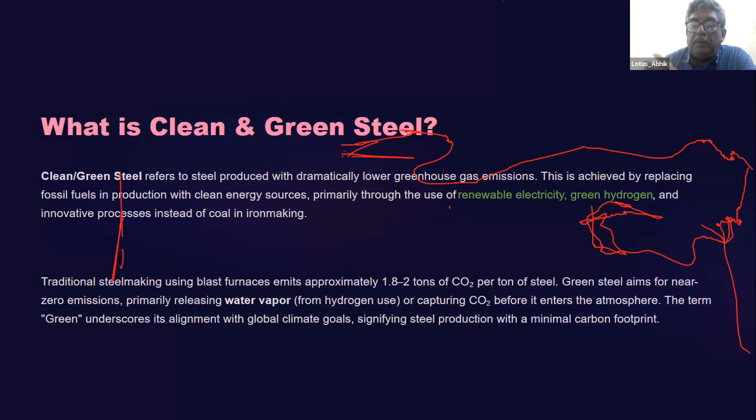The iron and steel sector accounts for 7 to 8% of global carbon emissions, more than any other heavy industry, primarily due to its dependence on coal in blast furnaces.

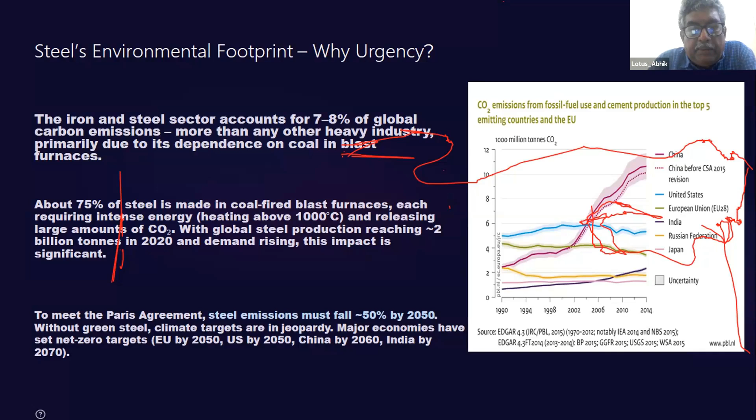Now let's come to the next slide, which is again a little bit of repetition. Global carbon dioxide emission, according to the World Steel Association: 1.88 billion tons of steel were produced globally in 2020, resulting in 22 billion tons of carbon dioxide. That is the figure.

And where is this carbon dioxide coming from? It is coming from the blast furnace and basic oxygen furnace route - 73%. Then the electric arc furnace route - 26%, and the remaining 0.5% from other sources. This share means that amount of carbon dioxide is being emitted in steel plants. Most of the emissions are coming from the blast furnace BOF route.

And about 75% of steel plants use this blast furnace BF route. Then comes the electric arc furnace, another route of steelmaking, which covers 25-26% of steel plants and also emits carbon dioxide. But as you can see, the blast furnace BF route is the main culprit.

Now coming to the blast furnace BF route: this BF-BOF technology uses coke to produce heat and, as a reducing agent, turns iron ore into metallic iron. So BF-BOF demands 8% of global energy and emits 7 to 9% of global CO2 emissions - I'm repeating, almost 10% of global CO2 emissions. The BF-BOF route requires 800 kg of coke to produce 1 ton of steel, and it emits almost 2 tons of CO2 per ton of steel.

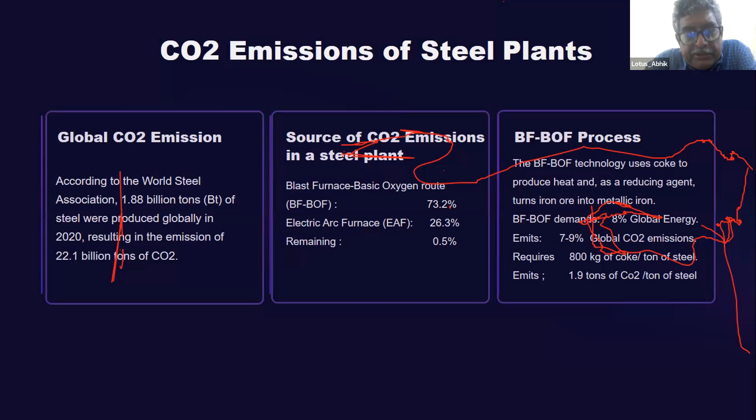Okay, now if we want to move forward and see how this can be reduced, we must know what BF is. Any questions so far? What is the BOF route? What is EAF? Then we'll go forward to see how this coke and coal can be replaced by hydrogen.

This is the blast furnace. On the left-hand side, you can see the blast furnace and the stoves - hot air stoves. In the stoves, air is heated up and pushed into the blast furnace. What is happening in the blast furnace? It basically operates on the principle of chemical reduction, whereby carbon monoxide converts iron oxide into elemental iron.

It converts iron ore into molten pig iron by charging iron ore, coke fuel, and limestone into the top of the tall vertical furnace. Hot air is then blasted into the furnace, causing the coke to burn and create carbon monoxide, which ascends as a gas to reduce the iron oxides descending from the top into molten iron. Limestone reacts with the impurities to form a liquid slag, which floats on the molten metal. The molten iron and slag are tapped from the bottom with the hot gas exiting the top.

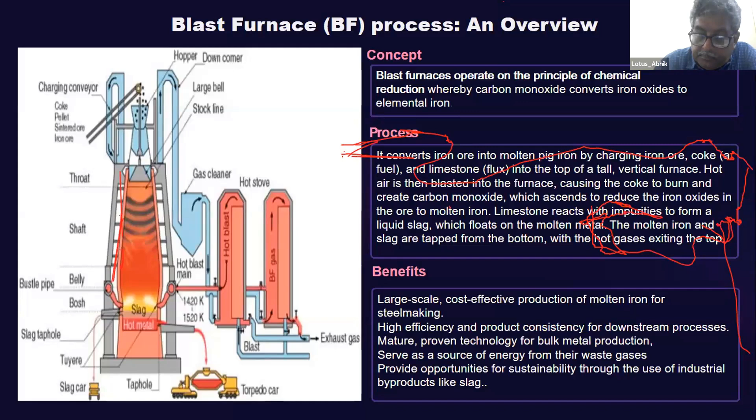Coming to the next slide, these are just the reduction equations. If we see the reduction equations, on the right hand side it is generating CO2, and that is the reason I put these reduction equations here. Fe2O3 is hematite, an iron ore. Fe3O4 is magnetite, an iron ore. FeO is wustite, an iron ore. These iron ores are reduced by carbon monoxide, and carbon dioxide is produced, which is a waste gas - which is our topic today, and which is polluting, which is not green, not clean.

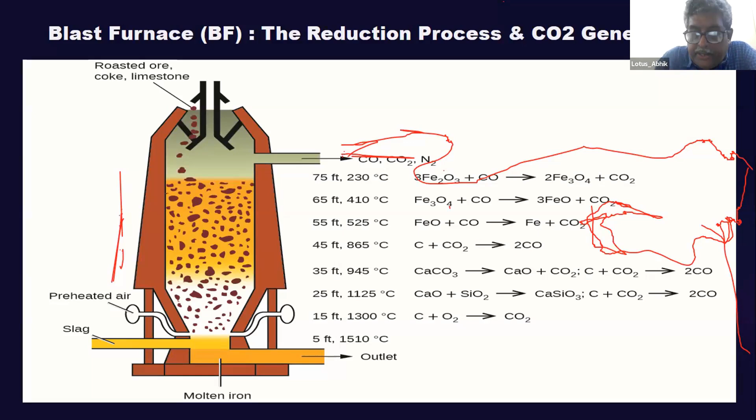This iron, Fe, is in liquid form. It is collected at the bottom as molten iron - it's pig iron, having a high level of carbon, saturated at 4 to 5%, which goes to the steel making shop and is converted to steel. So this iron has been produced in the iron making shop. Now it goes to the steel plant, the steel making shop.

It's a basic oxygen furnace process which converts molten pig iron collected from the blast furnace, and steel scraps, into steel by blowing high purity oxygen. The pig iron coming from the blast furnace is poured into this molten bath, along with some recycled scraps, and then highly pure oxygen of around 98-99% purity is lanced into it, stirring that molten bath.

You can see the reactions on the right hand side - the carbon is now getting oxidized. In the blast furnace, it's all reduction equations, reducing from oxides to iron. In the steel making shop, the impurities are being converted into oxide form - like carbon is oxidized and becomes carbon dioxide again.

This carbon dioxide is going up, which is also polluting the air, which is not green, which we have to reduce, which is our topic. And the other is the slags. That yellow part you can see is the slag, this steel slag, metal slag. They're like calcium silicate, calcium carbonate, P2O5.

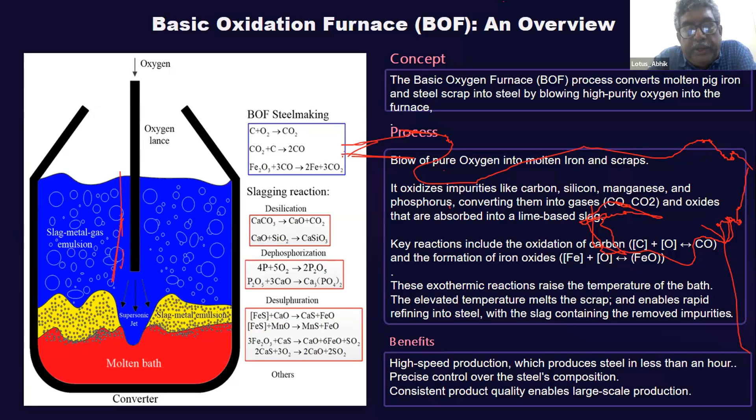These compositions can be controlled in this bath. So everything is fine, but on the other hand, we are getting that carbon dioxide again, and this carbon dioxide is going into the air as a waste and it's polluting the air.

Now, this is a picture of the entire steel plant, where it is simply showing how the carbon dioxide as a waste gas is coming to the atmosphere from different plants. I do not want to elaborate.

You can see the blast furnace in the middle, which basically produces at least 1200 kg of carbon dioxide per unit, per ton of hot metal, and this is the maximum one. But the sinter plant, the coke plant, the hot strip mill, the steel plant, the lime plant are also producing or emitting carbon dioxide to the atmosphere.

So in totality, the total CO2 emission is 1,815, or almost 2,000 kg of carbon dioxide produced per ton of rolled coil. Whatever steel plant is rolling, for each ton of rolled coil we see in the market, they have already produced two tons, or 2,000 kgs, of carbon dioxide, which is being mixed into the atmosphere.

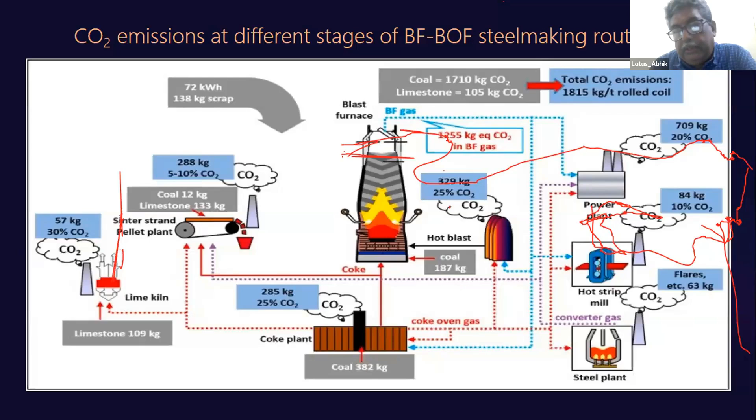Just simply, we cannot do anything with that. It is a waste, absolutely waste. It's nothing but pollution. Correct? So what to do? So much carbon dioxide is being produced. If we want to produce steel, we cannot do anything else till now.

Now, before we go to the remedy, there is another process which is also very important, but not as popular as blast furnace. This process is called the direct reduction process. The direct reduction process refers to a solid state process, which reduces iron oxides to metallic iron at temperature below the melting point - it is a direct reduction.

The iron ore which is put into the vertical shaft from the top is reduced to almost below the melting point of the iron. That is, it is reduced and not melted to a liquid pool, right? And how is it being reduced? It is reduced by the carbon monoxide gas, and by the natural gas.

So the natural gas and the carbon monoxide gas are pushed into that vertical shaft from the bottom, even from the middle side, and from the top. This iron ore is charged, and they are all reducing gas, so they reduce that iron oxide and extract the iron from it, and it becomes carbon dioxide, which then goes to the atmosphere as a waste gas.

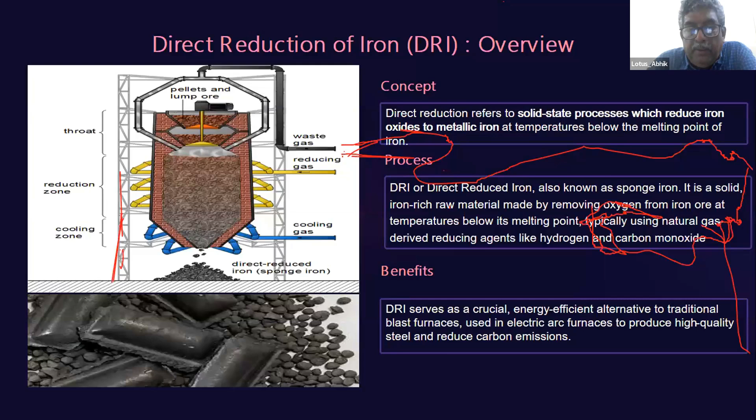We cannot skip this electric arc furnace, because as I said, if there is iron making, it should be followed by steel making. So what happens is this electric arc furnace, a secondary steel making process, uses recycled steel scrap, sponge iron, and pig iron from the DRI. Then there are the electrodes, electric arc, which with high temperature...

This EAF process melts scrap steel and other iron-rich materials using high-powered electric arcs from graphite electrodes to produce liquid steel. After charging the furnace with raw materials, the electrodes are lowered to strike an electric arc, generating extreme heat to melt the metal. Fluxes such as limestone are added to form a protective slag layer. Once melted, the liquid steel is refined and then tapped into the ladle for casting into a desired shape.

The benefit is that it's a sustainable method of production compared to primary methods such as the blast furnace, as it reduces the need for raw materials like iron ore and coke. Here in this steel making, we are not using iron ore, nor are we using coke. Coke is carbon, and carbon actually produces carbon dioxide. So massive carbon dioxide is not produced in the DRI-EAF route.

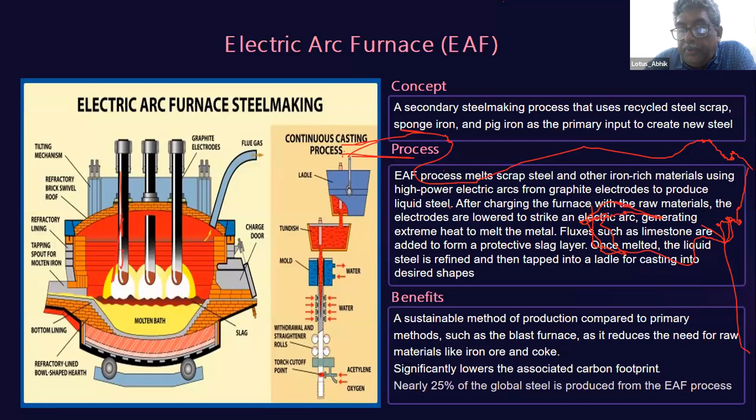This reduces the carbon dioxide emission. But on the other hand, this is very much limited. It is small scale. It is not producing iron and steel on a larger scale. So nearly 25% of global steel is produced from the EAF process.

Here is a diagram showing carbon dioxide per ton of steel produced by different processes of steel making. So there are different routes. First is BF-BOF, which we described, which is standard and general. If you go to any integrated steel plant, you'll find that BF-BOF route. This is, as I said, almost 2 tons of carbon dioxide they produce.

Then there's the BF-BOF route where, instead of coke, they are using natural gas. Then the DRI route, DRI-EAF, they are also emitting carbon dioxide, but not up to the level we get from the BF route. Now this DRI-EAF route, if you keep seeing the different processes, it is possible to reduce the carbon dioxide.

And finally, when we go to the HYBRIT, we don't find that emission of carbon dioxide. This is what we will be discussing after this slide. HYBRIT is basically how carbon dioxide, carbon monoxide, or carbon is replaced by hydrogen. That is the aim, that is the target of the global target, and that is the scope - there's a scope of research and study in this particular field, how hydrogen can replace the carbon. The carbon comes from coal, carbon comes from coke, and how is it possible to replace it?

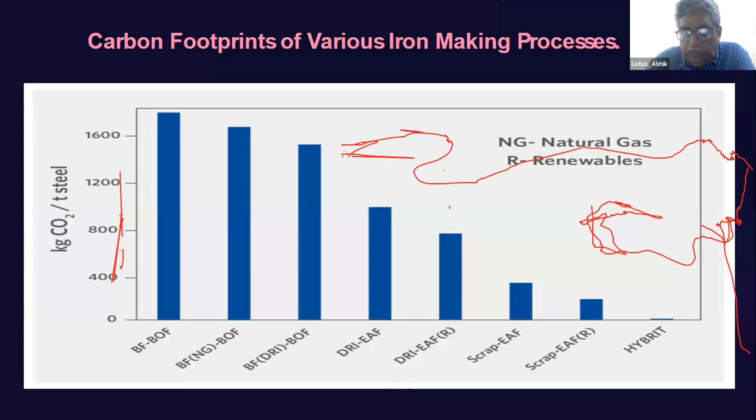Okay, so the next slide is about a global meeting, COP26, where 40 countries launched the Glasgow Breakthrough for Steel, aiming for near zero emission steel - that is near zero CO2 emission from steel.

That is the target, global target: to be the preferred choice globally by 2030. By 2030, the global target is that at least 90% emission reduction should be achieved.

How is it possible to do it? It's the initiatives driving R&D at a faster pace. This is why it's written in bold, because academics are in the audience, and it is for them to do the research work and to study in this particular area, how it is possible to reduce carbon dioxide and make steel more cleaner, more greener. That is the future of steel. So blast furnace may go off, and blast furnace will be replaced by something else. That's what we will discuss now. This global momentum demands updated curriculum and research from educators.

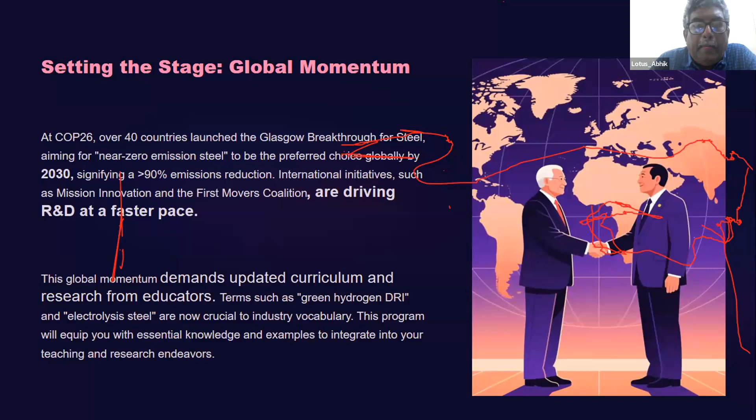Before I move to this hydrogen area, is there any question from the audience which I can answer? Okay, we'll go to the next slide. Is there any topic which I should go back and repeat? Okay, the first thing is that...

Environmental impact: if you reduce CO2, what will happen? Eliminate billions of tons of carbon dioxide, and carbon dioxide reduction reduces air pollution. China is producing 50% of all steel, and needs green steel for carbon neutrality. China needs more, I have shown you the graph.

Energy and resource impact: if we use hydrogen to replace the carbon, particularly the coal, then what do we need? It requires significant clean energy. For example, Europe needs 400 trillion watt-hours of renewable electricity to produce hydrogen. Immense. By 2050, this creates demand for renewable infrastructure and hydrogen production. So hydrogen production has to be there. Otherwise, how do we get the hydrogen?

Then economic and industrial benefit: a new chapter, new work. This opens a new market with premium fossil-free steel. Early leadership offers a competitive edge and creates new job opportunities in fields like hydrogen and CCUS. I'll come to the CCUS, while avoiding carbon tariffs.

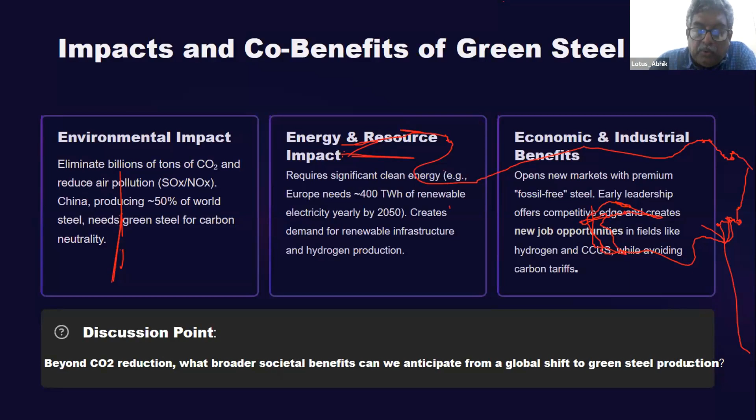I'll go to the next slide. This is the hydrogen-based direct reduction, H2 DRI process. So we have learned that in the DRI process, direct reduction of iron, the iron ore is pushed from the top and the natural gas or coal gas is pushed from the bottom, and there is a reaction between the coal gas, CO gas, C, and the iron ore. It extracts the iron from the iron ore, and it is formed into briquettes and small pellets, and it is not at very high temperatures.

It's almost a lower temperature, and since the reducing gas is carbon monoxide, and natural gas also consists of carbon monoxide and carbon dioxide, the waste gas that exits from the DRI process includes carbon dioxide, which is a waste gas that actually pollutes the atmosphere. Now, the point is: is it possible to replace that natural gas? Is it possible to replace the carbon coke and coal gas by only hydrogen gas?

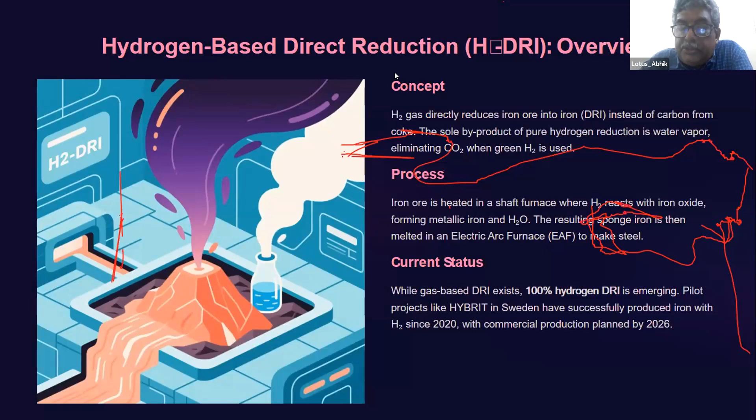Some opportunities and some challenges. Opportunities: it cuts 95% of CO2 because it produces no carbon dioxide emission if using green hydrogen. It leverages proven DRI furnace design. Companies like SSAB HYBRIT plan full blast furnace replacement by 2030.

Strong momentum with 96 million tons per year announced capacity by 2030. These are the opportunities, but challenges too. Hydrogen supply is the biggest hurdle. One ton of DRI via H2 needs 50 to 60 kg of hydrogen, requiring 2.5 to 3 megawatt hours of renewable electricity, massive power needs and electrolyzer deployment.

The cost of green hydrogen is very high. Metallurgical adjustment and hydrogen embrittlement is also there. So it's not a very easy task, there are certain challenges. If you use hydrogen, then some challenges we have to face which we don't face with the carbon, coal and coke route, that is the blast furnace and BF route.

So, discussion point you can take home: given the massive electricity demand for green hydrogen production, how can grid infrastructure and renewable energy deployment scale effectively to meet future green steel needs? That means grid infrastructure and renewable energy deployment is another new chapter which will open up if you want to use hydrogen instead of coal.

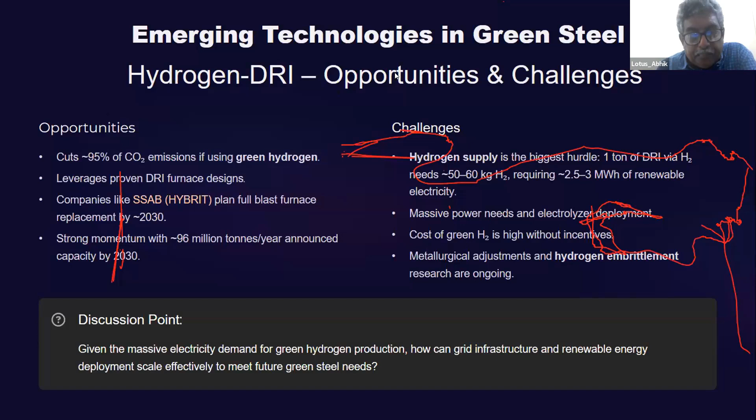I'll go to the next slide. Here comes the equation, and here is a typical schematic diagram of a hydrogen DRI. It's similar to DRI, only instead of coal and coal gas, hydrogen is being charged. So hydrogen and iron ore react, hydrogen reduces the iron ore into iron, sponge iron, which then goes to the EAF for steel making.

Now here's an important part. If you see the equation, FeO, which is iron oxide, reacts with hydrogen and becomes Fe plus water steam. But when using carbon gas, coal gas, FeO plus CO becomes Fe plus CO2. This is the difference: one produces steam as a byproduct, the other produces carbon dioxide after extracting the iron.

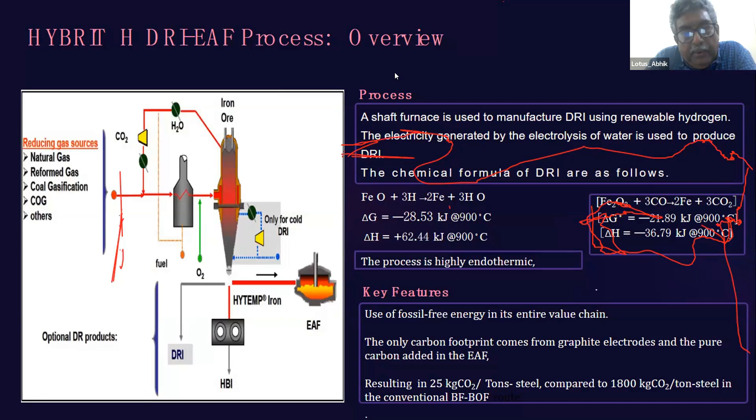So any carbon dioxide that emits from this process comes from the graphite electrodes, if there is any. Otherwise there is no trace of carbon dioxide in the process, it's only hydrogen. But I'll come to the next one.

The next one is basically the challenges. If you use hydrogen, it's not that easy, you have to face challenges. What are the challenges? One after another, we can go through it. The first challenge is getting the hydrogen.

A plant with a capacity of 1 million tons per year of steel will require 100 kilotons of hydrogen, equivalent to almost 12 tons of hydrogen per hour, or 140,000 normal cubic meters of hydrogen per hour. It's a gas. In order to get that 12 tons of hydrogen per hour, or 140,000-142,000 normal cubic meters of hydrogen per hour, it shows that an electrolyzer which produces hydrogen with a capacity of at least 600 megawatts is required to generate that amount of hydrogen.

That is a major thing, the engineering thing. The second point is sourcing of high grade iron.

Actually, in this process, high grade iron is required - the more purified iron ore. The grade of iron ore is basically depicted by the percentage of iron in that iron ore. Say for example, in an iron ore there is 65 to 66% iron, and the rest is impurity like sulfur, silicon dioxide, silica, calcium, lime - all those things are there. So impurities are there, and this hydrogen-based process needs high grade iron ore.

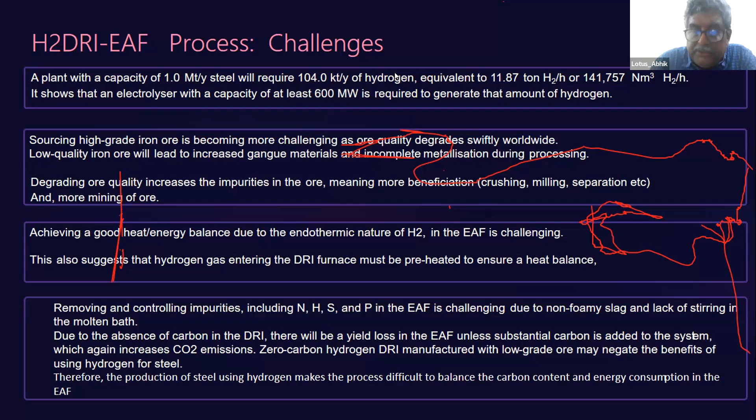But if you use hydrogen, then the microstructure changes. The problem is that if you increase the temperature, I don't want to get more into it, but if you increase the temperature, then you'll find sintering, and you'll find that the porosity of the iron ore reduces.

What happens if the porosity of the iron ore reduces? The gas, like the carbon gas or hydrogen gas, cannot go inside it, and so cannot diffuse inside it. And if it can't diffuse inside, it cannot react with the iron inside. So if you can't react with the iron inside, then you are not extracting the iron. So the process will be slower and slower. Okay, so this is what happens with temperature. This is another very challenging part if pure hydrogen is being used.

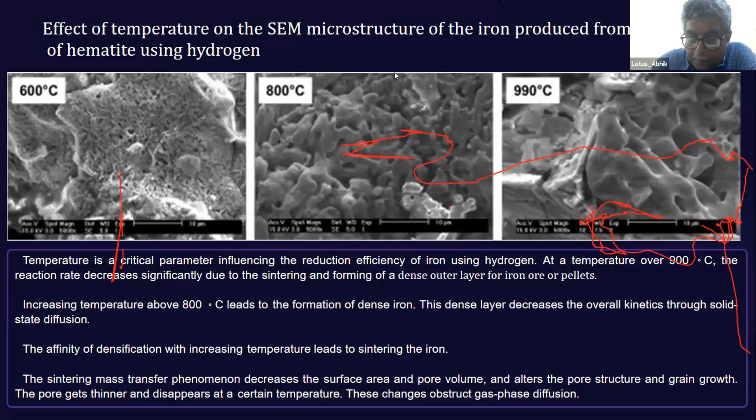The other method, I have already discussed the hydrogen-based DRI-EAF process. Now there is another process which I'll briefly mention, which is probably a subject that has been taught to you or discussed in a lecture sometime back. It is CCUS, carbon capture, utilization and storage. So CCUS involves capturing carbon dioxide emissions from steel plants for either storage underground or utilization in products.

Potential capture points include blast furnace gas and off gas. So whatever gas is coming out from the blast furnace, if there's a process, it can be stored underground. Simply, it is sequestered. The captured CO2 can be sequestered geologically or converted into useful chemicals such as ethanol by microbes.

CCUS could theoretically retrofit existing assets, but its full commercial implementation for blast furnaces is still in early stages. As of 2024, six steel plant CCUS projects are in development, but progress remains slower than the hydrogen-based route.

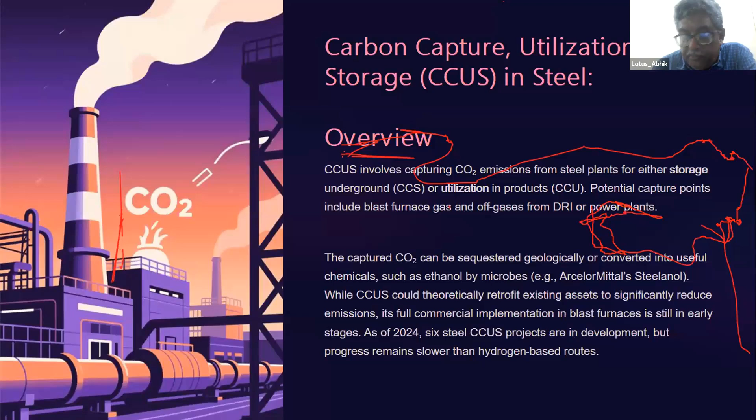The other method is electrolysis, and the advantage of this electrolysis is that there is no direct CO2 emission, it has modular potential, and it utilizes low grade or fine ore. Unlike H2 DRI, it can use low grade and fine ore, with pure oxygen as a byproduct for industrial uses.

Boston Metal aims for a demonstration plant by 2026. Challenges include very high power consumption, material engineering for corrosive molten oxide environments, and scaling from pilot to industrial.

Electrolysis could be a leapfrog technology for 2040 and beyond, offering a long-term research frontier for academia. Actually, this is still in the laboratory regime, still under experimentation. I'll just explain what that electrolysis process is, briefly.

But it has not yet been commercialized, though it has potential. The target of scientists is 2040, 2050, where the electrolysis process will come in place, which will replace the BF-BOF route, and this electrolysis process will produce steel.

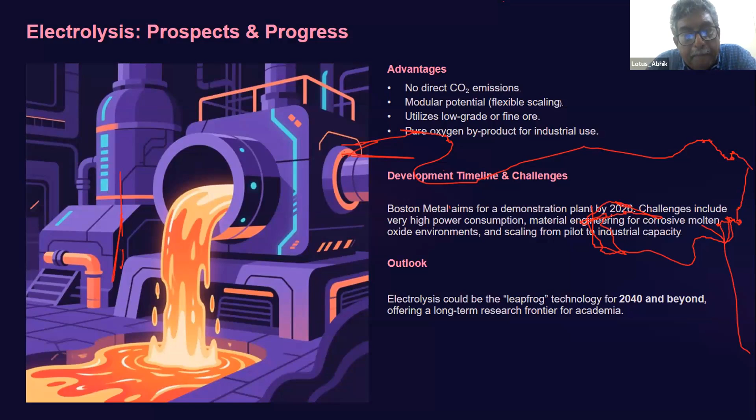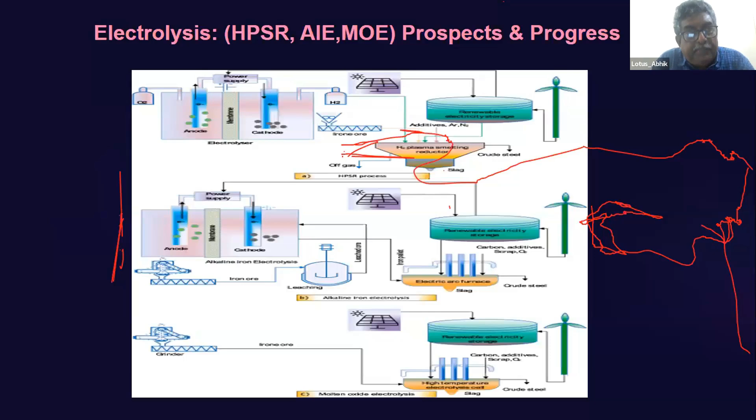Here the anodes and cathode are being used to separate iron from the cold iron ore.

There are different types of electrolysis processes. I'm not going into the details, as the time is not much, I think. There's one, hydrogen plasma smelting reduction, then the alkaline iron electrolysis process, then the molten oxide electrolysis process.

So Fe is the iron which we need for steel making. What are the challenges? The challenge is there's very high heat loss. If you go to electricity, very high heat loss, 40% of the heat goes to waste.

Very low current efficiency and the corrosiveness of the electrolyte. The electrolyte becomes corrosive; after some use, you have to throw it away and replace it with a new electrolyte. So as of now, this process is not yet economically feasible, particularly due to the unavailability of a carbon-free, cheap anode capable of sustaining a corrosive environment.

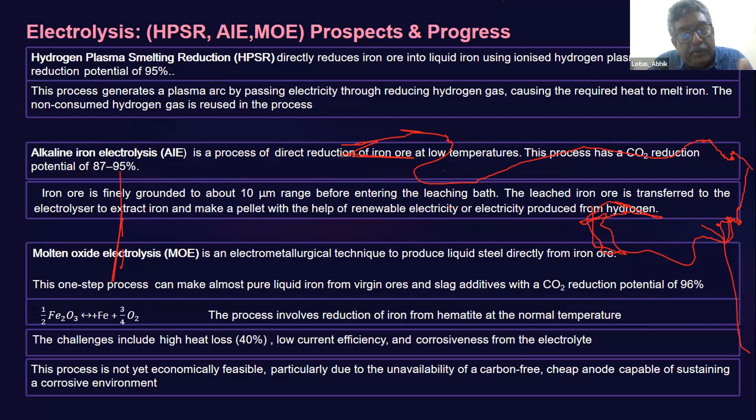There's another process method, that is the biomass. So as of now, I have explained hydrogen DRI, and also carbon dioxide CCUS, that's carbon capture, utilization and storage, which is sequestered, and that is one way of reducing carbon dioxide from the atmosphere. The third is the electrolysis process, which is under experimentation now, and people think that after 20 to 30 years, the electrolysis process may come up in a big way.

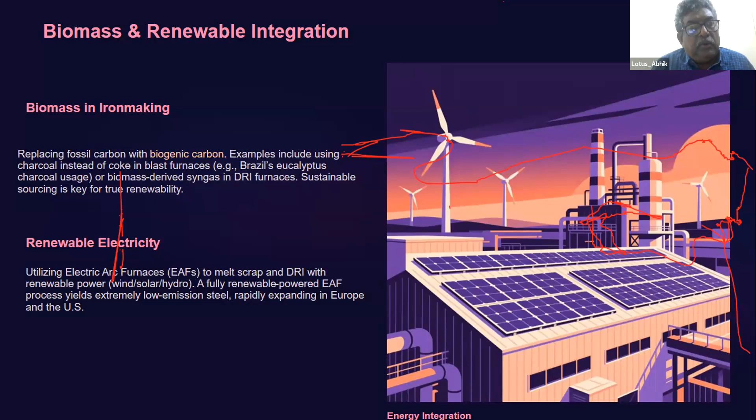There is a biomass method. This biomass method is what is actually happening. It is basically the same DRI process, where pure hydrogen is not being used. Coal gas is being used along with the hydrogen.

So some processes are there. In one process, the iron ore is first ground into small particles, and then preheated to around 700 degrees centigrade. It is first reduced in a cyclone, and then put into the smelting reduction vessel, where dry coal is used in the smelter. In this smelter, the small particles of iron ore are reduced to iron, hot metal. Oxygen and hydrogen are also used here, along with coal, just to replace a little bit of the coal.

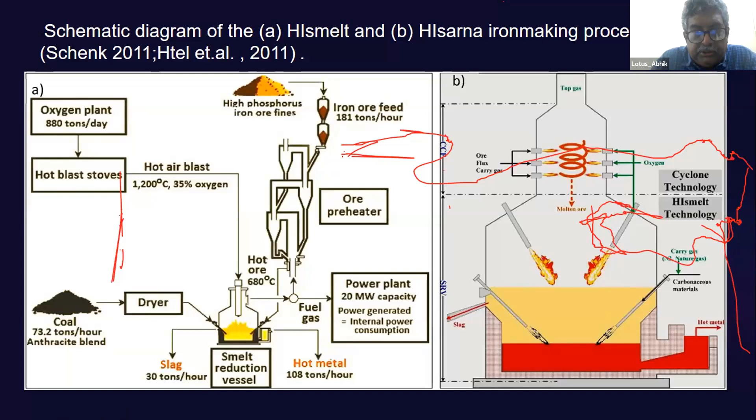This process, HIsarna, is a coal-based iron making technology which I just showed. It is being developed by Tata Steel, a combination of cyclone converter furnace and smelting reduction furnace. It targets to reduce carbon dioxide by 80 to 95% by 2050. It is a direct smelting process based on coal-derived biogas. In this process, iron ore particles are preheated and pre-reduced in circulating fluidized bed reactors integrated with two-stage cyclones. After that, the hot ore is transferred to a smelter to produce liquid iron. Here, coal-derived biogas can be replaced fully or partially by renewable hydrogen.

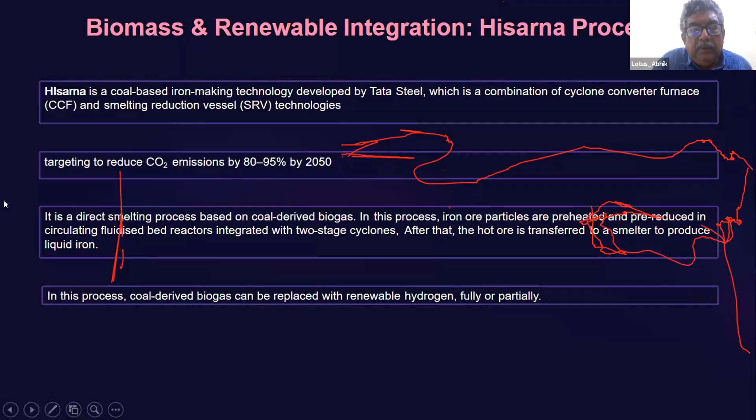So the process is Corex, Finex, and the previous one is Hisarna. Corex, Finex, Hisarna, and there are many others like Midrex. Lot of trials are being taken with Corex, Finex, Hisarna. So all of the principle is the same.

The principle is to get the iron ore from the mines, crush it into minute particles like 10 micrometers, and then preheat it in the cyclone or in the fluidized bed, preheating and reducing it with the coal gas itself.

As I said, the iron ore particle is hematite or magnetite, with the formula Fe2O3 or Fe3O4, higher oxides. It is reduced to the lower oxide, wustite, which is FeO.

So now this FeO, formed from the minute particles, goes to the molten bath, that is the smelter, and with the electric arc, this molten bath reaches a very high temperature and becomes liquid. It's a bath, a liquid pool of FeO.

Now you charge the coal gas along with hydrogen gas into the molten bath. This bubbles out, and they reduce the FeO at that high temperature to Fe, while themselves getting converted to CO2, carbon dioxide, and hydrogen steam. So carbon dioxide and hydrogen emit to the atmosphere.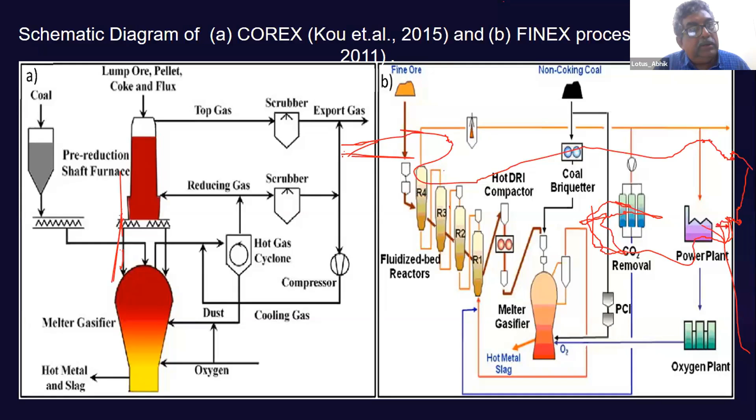I have talked of Corex, Finex, and I'll skip this one. Now I come to the end of my lecture on innovations in energy efficiency and other enabling tech.

I'm keeping this slide because other than these processes, there are other ways that can be applied to reduce the carbon dioxide, reduce climate pollution.

The other ways are like AI, artificial intelligence, for process optimization to minimize energy waste, digitalization, Industry 4.0 tools, IoT sensors, digital twins, AI and ML to optimize processes, detect inefficiencies, and manage energy-intensive steps.

Electrification of ancillaries, replacing diesel equipment with electric, emerging ideas, research into direct electrochemical iron reduction at low temperature, like microwave plasma-based reduction, and alternate reductants like green ammonia or biomethane. These are the emerging areas.

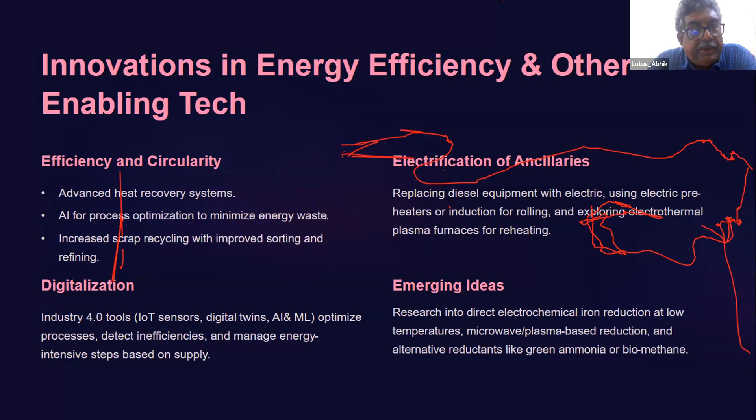So coming to what I said, other than the standard conventional and traditional routes like BF-BOF, blast furnace and basic oxygen furnace, which is used by 75% of steel making plants, and which produces 1200 kgs of carbon dioxide to produce 1 ton of hot metal.

The other route is DRI, direct reduced iron, and EAF, electric arc furnace, where direct reduction iron produces pig iron. I have shown the picture of the pig irons and briquettes, which are used in the electric arc furnace, where the electrodes are pushed to convert it in the molten bath, and oxygen is lanced to get rid of the slags or oxidize all the impurities.

Carbon is converted to carbon dioxide, sulfur is converted into sulfur dioxide, phosphorus is converted into phosphorus oxide. So all oxides are being formed, and the carbon dioxide is a gas which escapes. The others are solids which remain as slag and float on top of the steel, and they are gradually taken out and the steel is poured out.

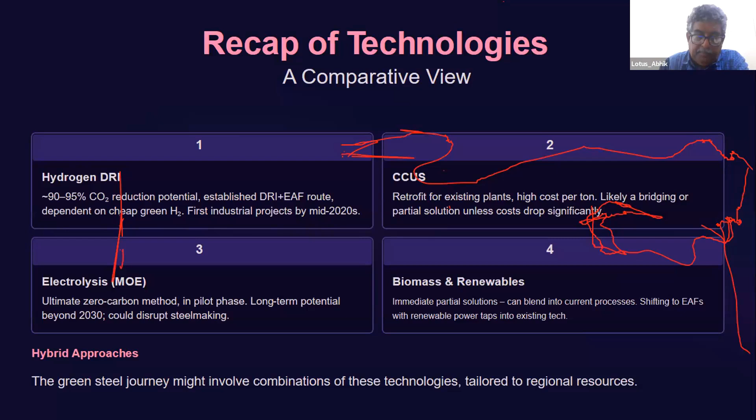The process I have already described, so I'm coming to the last part of my session. It's just to give some information about what is happening all over the world regarding green steel.

EU, European Union, Green Deal targets net zero by 2050, with 55% reduction by 2030. That's the target. EU Emissions Trading System: steel plants must buy carbon dioxide permits. Carbon Border Adjustment Mechanism: tariff on imported steel CO2. We know, as of now, a lot about tariffs, so tariffs may be considered on steels that produce CO2 - more CO2 they produce, more tariff will be imposed on them.

Clean Steel Partnership is important for academicians - millions for R&D on hydrogen CCUS technology are being floated, and universities are being asked to do the research. Then, a 40 gigawatt electrolyzer target by 2030 - electrolyzer meaning the electrolysis furnace. Europe leads in hydrogen DRI pilots, CCUs, and public green procurement. These are the policies I just read.

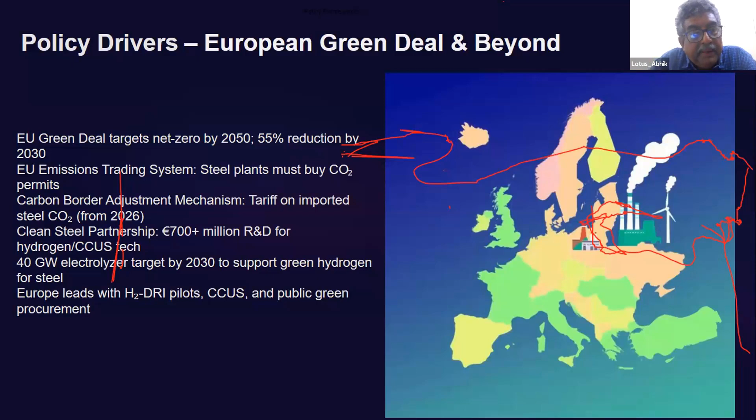Global climate: COP26 Glasgow breakthrough on steel, which I already mentioned. Near-zero steel again preferred by 2030. India pledges low carbon steel in government projects. China to peak steel emissions before 2030, expanding the EAF route. US First Movers Coalition launched in 2021 at COP26 to boost green steel demand. Talks for a global clean steel standard and US-EU low carbon trade. International knowledge sharing - Japan, Canada on CCUS and H2.

So all around the globe, people are now talking about hydrogen-based DRI, electrolysis, and systems like Finex and Corex, and they want to replace the BOF route - they want to replace it with the DRI-EAF route. The DRI-EAF route will remain; only the carbon monoxide, the coal gas, will be replaced by hydrogen. So there will be more DRI and EAF route, less BF and BOF route. By 2050, the BOF route will not be there.

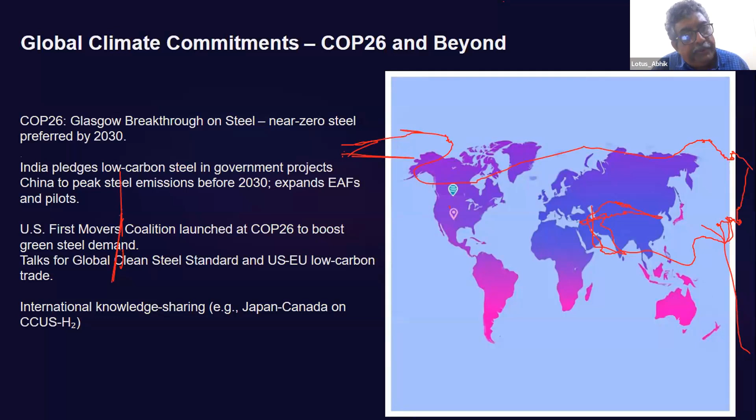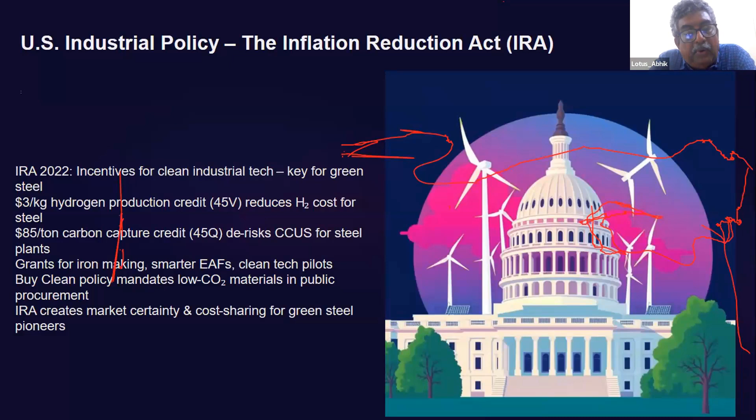Same thing: IRA 2022 incentives for clean industrial technology, key for green steel. Then $3 per kg hydrogen production credit - so if you produce steel using hydrogen, you get a credit from the government, $3 per kg. $85 per ton for carbon capture. Grants for ironmaking, smarter EAF, clean technology pilots, buy-clean policy mandates, low CO2.

Who are the industrial leaders now who are doing these things? SSAB, HYBRIT SSAB, LKAB, Vattenfall. They delivered fossil-free steel to Volvo in 2021, prototype car in 2022.

10% of Sweden's emissions are to be cut via the SSAB transition, SSAB HYBRIT. There is academic collaboration with KTH, Luleå University for R&D.

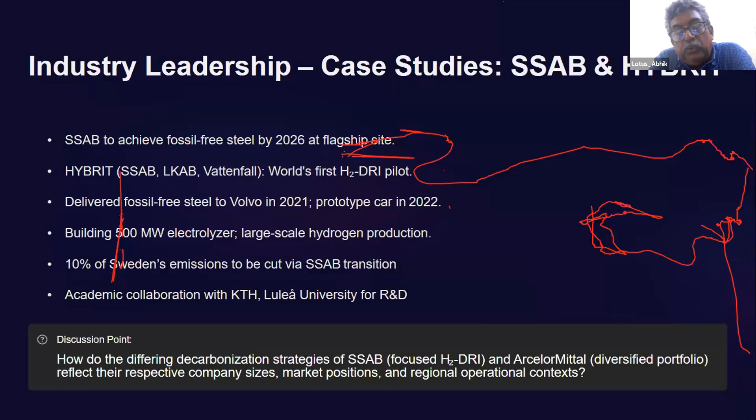I've delivered my lecture on steel, the clean, the green, and near future steel. Mainly it's about hydrogen-based steel production, not carbon-based steel production. It talks about electrolysis, direct electrolysis of iron ore, where iron is extracted via the electrolysis process.

It also covers CCU, which is capturing the carbon dioxide. Even if you emit carbon dioxide, before it goes to the environment it is captured and put underground, and this carbon dioxide is converted into ethanol and other things. I also touched on the Finex and Corex processes, where in the smelter, coal gas and hydrogen are used to extract iron.

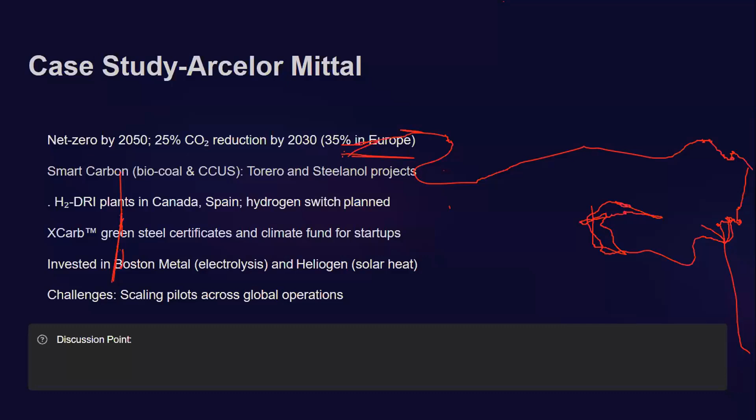Is there any guideline for industrial steel making in India for zero carbon emission by the government of India?

JSW and Tata Steel. Tata Steel has a plant in Europe, and they are doing an experiment there in the Netherlands, which I also mentioned earlier. That is the HIsarna process. I personally have visited that plant, I have seen it. So it is still under experimentation, with a lot of problems and issues, but it's research work.

It is experimentation work. A lot of money is being put into it. So as of now, JSW and Tata Steel are looking forward. They have to go for hydrogen-based steel. They have to reduce carbon dioxide, because that's one of the reasons properly.

We are coming to the... just a minute, can you give me a minute? Second, I have to take a little bit of water.

So all of you are now hearing here and there in the TV about the tariff, the US tariff. Now Tata Steel, JSW, and many steel plants also export steel to the USA from India. Now there could be a case that there will be a carbon credit or carbon discredit, which means they also measure how much carbon dioxide you are producing from your steel plant per ton of steel. If it is 1,000 kg per ton of steel, then your tariff is this.